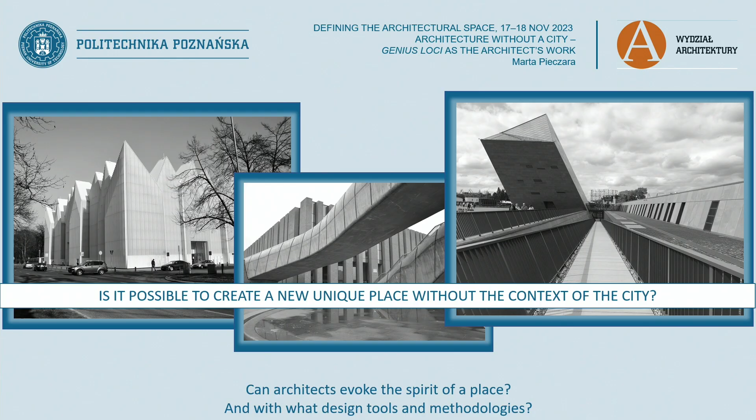So my question is: can we, as architects, create unique spaces without a city? Just in a vacuum, in a void? And if so, what kind of methodology, what kind of design tools could be of help?

Let me start with some theoretical background to this problem. No doubt you are well aware of some of these terms, nevertheless it is very important to explain the logic behind this problem.

First of all, the idea of genius loci in ancient Rome was interpreted as the protective spirit of a place. Today this term is so widespread that there is a variety of pronunciations - Americans would say genius loci or genius loci. That's why I decided to say genius loci, but it's a term that is being used in the discourse in philosophy.

When speaking about landscape, one of the beautiful definitions we come across in landscape studies is that genius loci is the value that defines the character of a space, hence this direct link with identity. Norberg-Schulz almost identifies the identity of a place with the identity of a person. He writes that the identity of a human assumes the identity of a place - the identity of a place is the foundation upon which the identity of a person is constructed.

So, on the basis of this model that he ordered, he made drawings, he also examined his pictures, and he noticed three interesting forms of landscape: the cliffs that provide a beautiful viewpoint to the ocean, the canyon shaped by water, and the plateau, easily accessible from the road. These three features of the landscape served as an immediate source of ideas, references to the history of architecture.

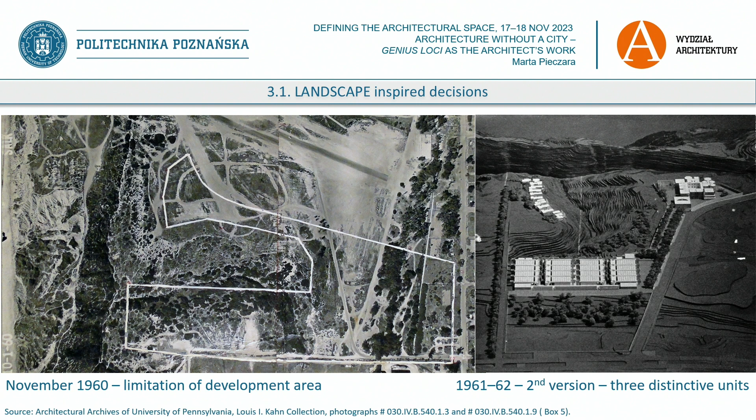And this is what Kahn relied on. He sketched bridges he saw in Italy, a variety of facilities he came across during his travels, mostly originating from his journey to Rome and Italy. This is where his first vision came from: the three independent parts of the institute. It would be composed of a laboratory, a conference center, and a residential part, all associated with the three forms of landscape.

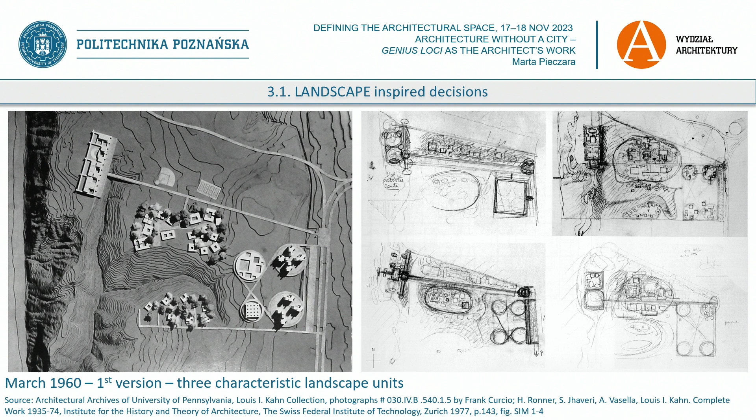Let me go back to the previous slide. On the left, we can see the lecture hall, which was supposed to be located above the cliffs and provide users with a beautiful view.

Unfortunately, several months later, the architect received a bird's eye view of the land, and it turned out that the building could not be located where he wanted because the area was protected due to rare endemic plant species found there. Nevertheless, in his first assumptions, the connection of this part of the plot with the conference center was so strong that he simply decided to move it a little bit inland in order to fit the limits allocated for development, but he still wanted to preserve this connection to the landscape.

And the three parts of this project are called as a reference to old icons. So the conference center is the new Acropolis, the temple of knowledge. We talked about temples today. That was supposed to be a temple of knowledge, a place for meeting.

And then the Pompeian village. We listened to a lecture about Pompeii today, so it's an intellectual shortcut for the architect. He uses these picturesque images of houses, harmonious houses that are somehow fitted into this landscape. And finally, the labs.

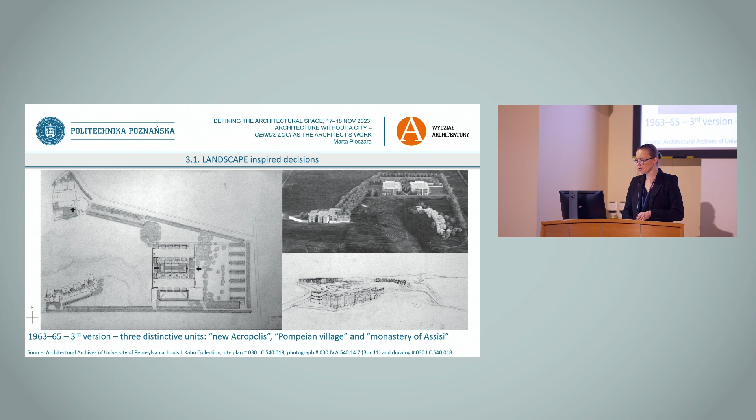The labs perform the key role, the key function, which he called a monastery. He was inspired by the monastery in Assisi because this monastery was listed by the client as the perfect environment for scientists to work. So, as far as architecture designed for the purpose of these three units that are linked to the landscape, we can see that the architect has used a variety of methods.

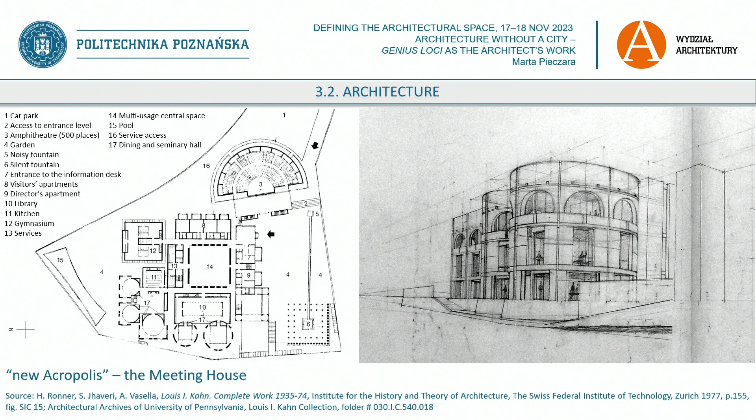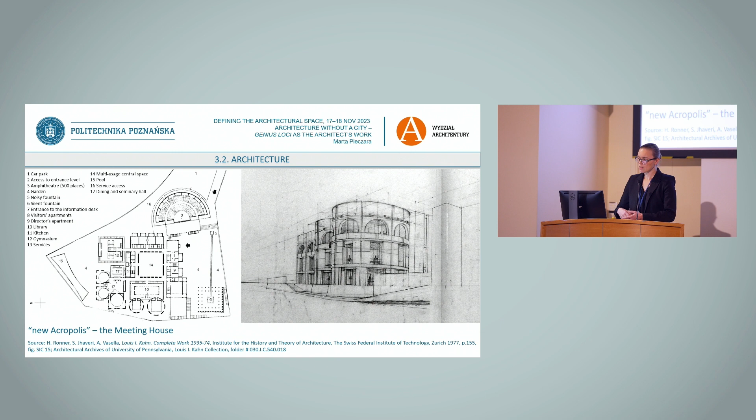He uses a very extensive typological analysis of architecture, relying on the richness of ancient forms, including Roman architecture, as you can see in the sketches in the section. Let me emphasize once again the aspect of landscape, the fact that it is so beautiful that the building is supposed to crown the cliffs, transformed into this round form of buildings that offer these beautiful views.

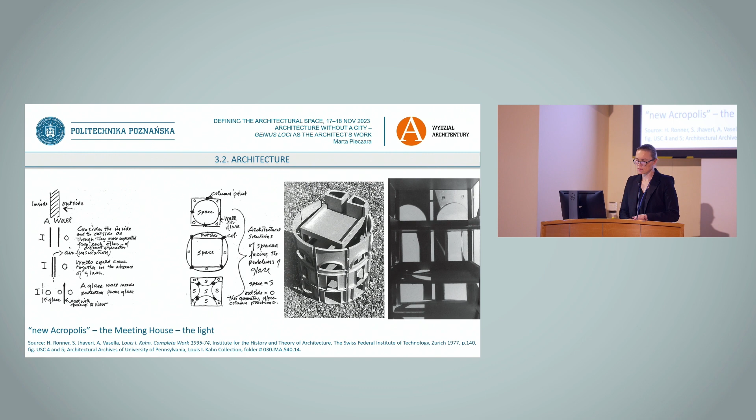So speaking about this project, we cannot disregard light. It was one of his key assumptions. In his previous works, he came up with the idea of a double wall. The building was surrounded by a second wall that was also inspired by the ancient Rome ruins. And once again, archaeology links beautifully to this project.

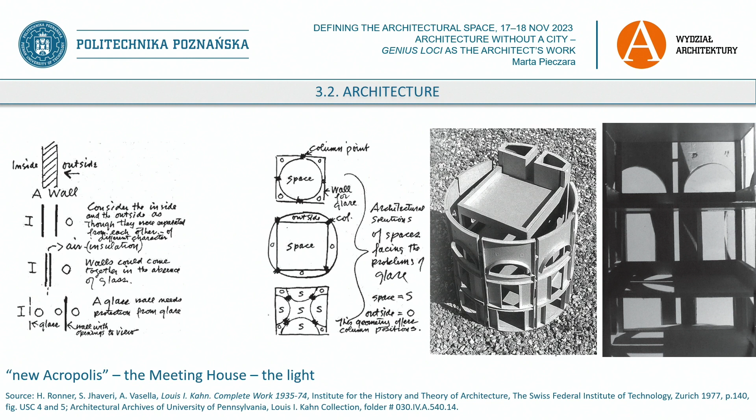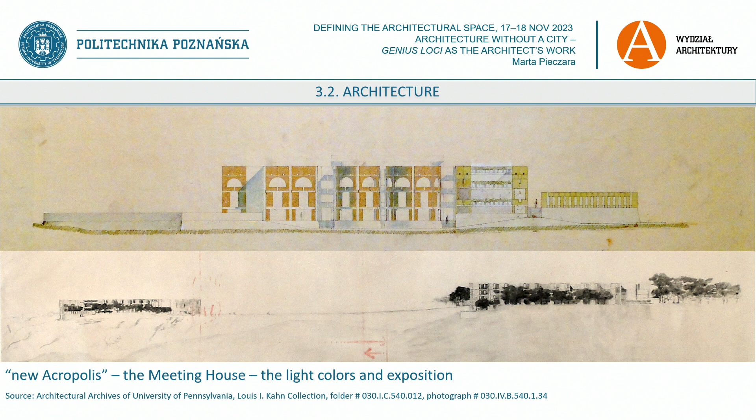Having calculated precisely the distance between the first and the second wall, we can ensure that the windows are shaded during these key periods of the year when the building could be overheated. Today we use computers for this purpose, but to make sure this was exactly the effect, a model was simply erected on the plot, and observations were carried out to see if it actually works or not.

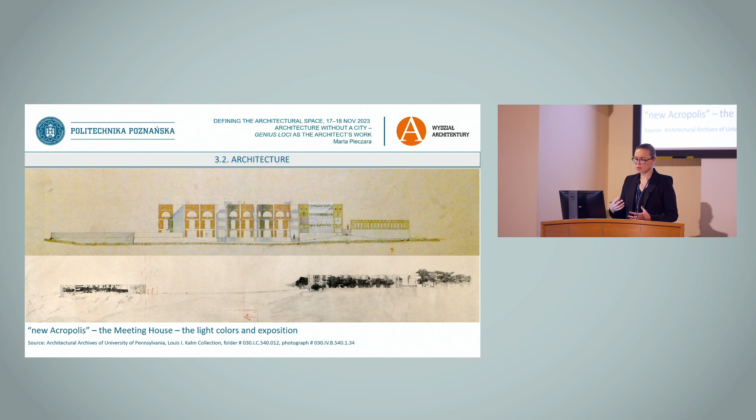And then color. Louis Kahn focused on the effect that the light will create on the facades of his buildings, and how to modify this effect so that it is harmonious with the landscape. So he was looking for the right hue, he was looking for the right color.

And now over to the residential part. It was supposed to be based on the archetype of the Pompeian village. So he was also looking for the right typology, the rhythmical objects that are here squeezed into this canyon. He wanted also to use this picturesque quality of the cliffs, of these small oases of greenery with trees.

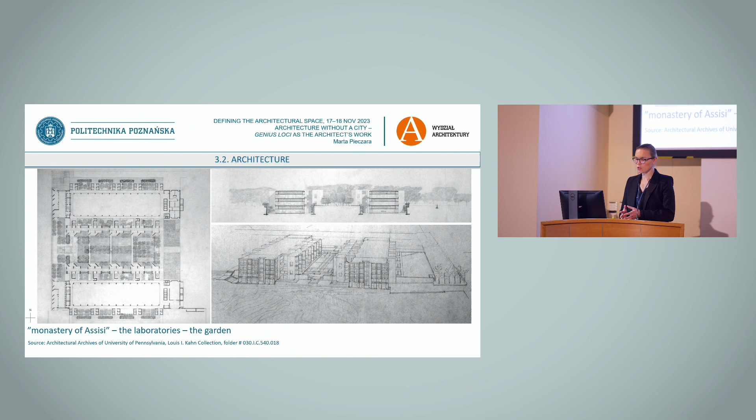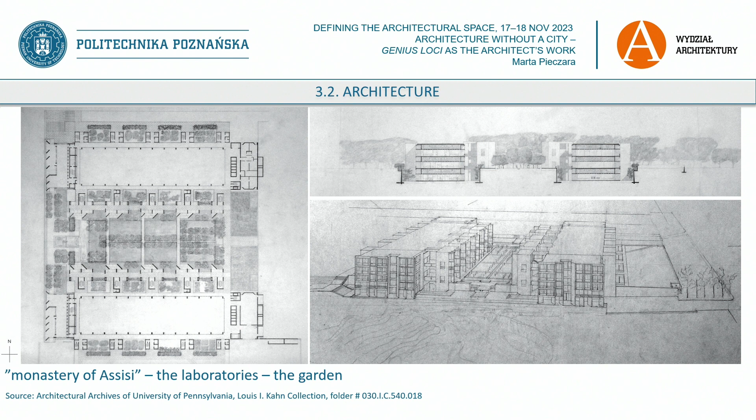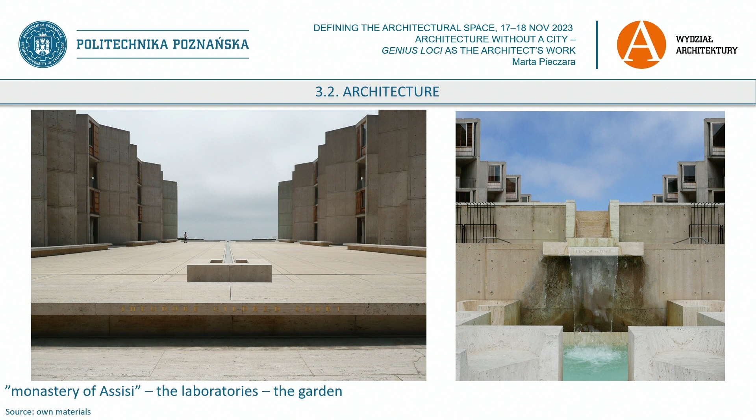And then the labs. The laboratories were supposed to be inspired by the monastery in Assisi. Originally, there was a garden in the middle, and the cells, so to speak, of the scientists were to provide a garden view. But then, as a result of cooperation with landscape architects, the garden was replaced with this square. It's a public space with a water body, and it's considered unique worldwide.

So people travel there to look at the ocean, and Louis Kahn managed to create this project in a place that was deprived of any kind of urban context.

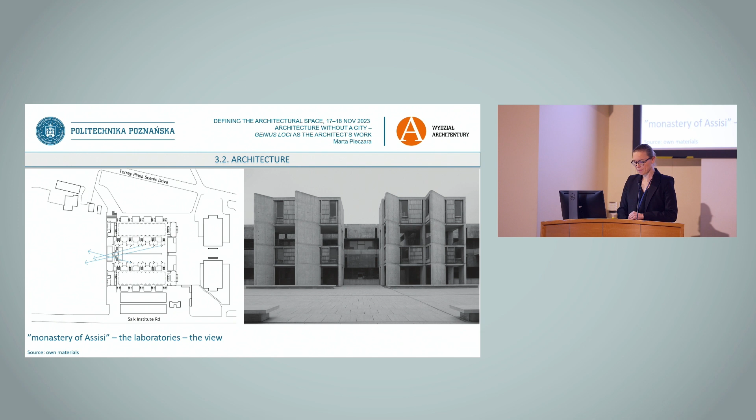When it comes to the rooms that were inspired by the cells of monks that face the internal court, let me explain why they are located every second floor. Well, the client said that the worst thing for scientists in this area is the sense that just above you there is another scientist who is one step ahead of you, and the scientists that work on developing vaccines.

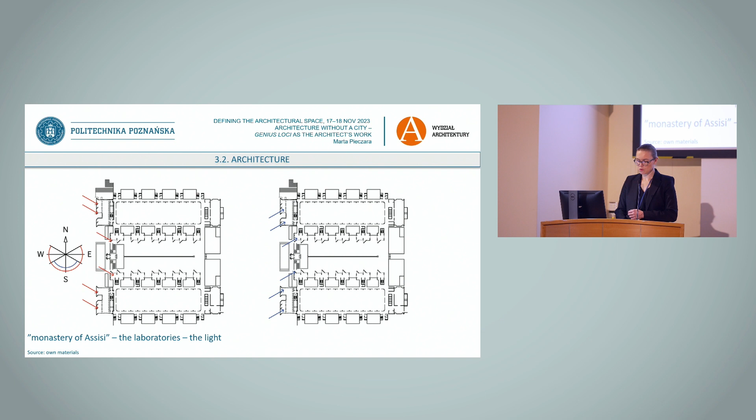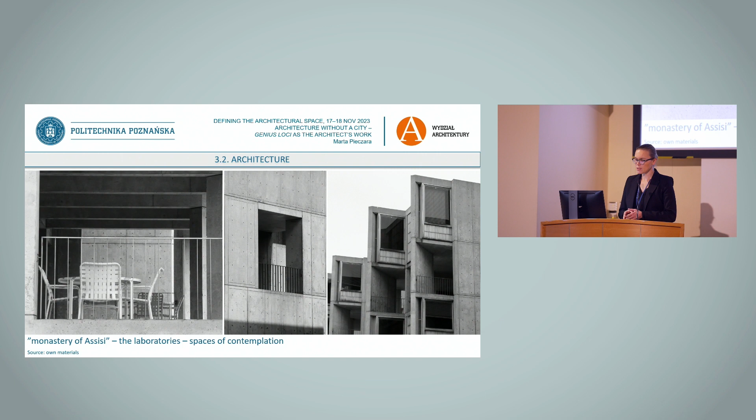So, light. Let me once again tell you that this placement of the walls at the angle of 45 degrees is not accidental. It provides shade during the summer season. And once again, referring to this atmosphere of work at the monastery in Assisi, the architect proposed these external places for contemplation, for the exchange of thought between scientists, focusing still on colors and on materials.

And today, during one of the presentations, I also saw the analysis of colors, right? This is something that we do also today. And Louis Kahn, 70 years ago, also carried out color analysis, and specifically it was about the color of the cliff. So to obtain this color of concrete, it took a lot of time, a lot of tests, and he even had to send his employee to California in order to ensure the sample of concrete that would be the exact beige color that he wanted.

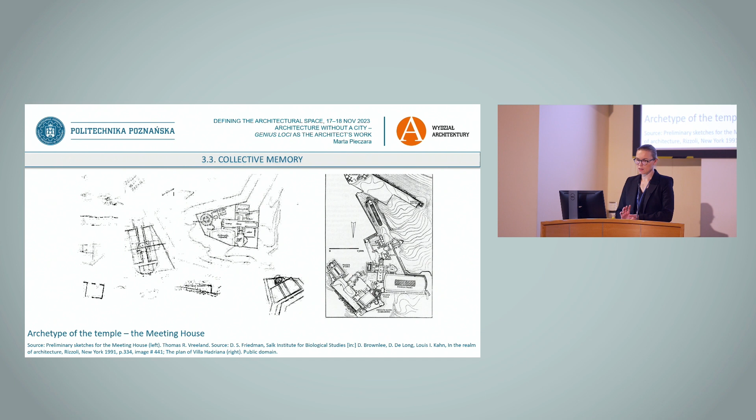So here we have these structures that are made of landscape and architectural elements. But how did the architect manage to add the element of human's memory? Well, he used archetypes. How did he do it? By examining typology. And here archaeology turned out to be necessary.

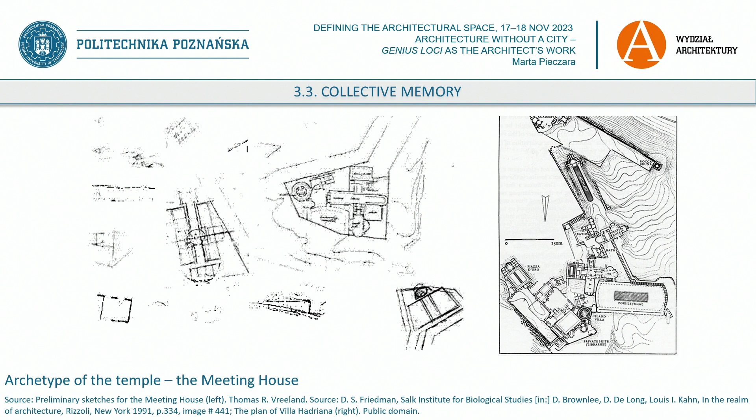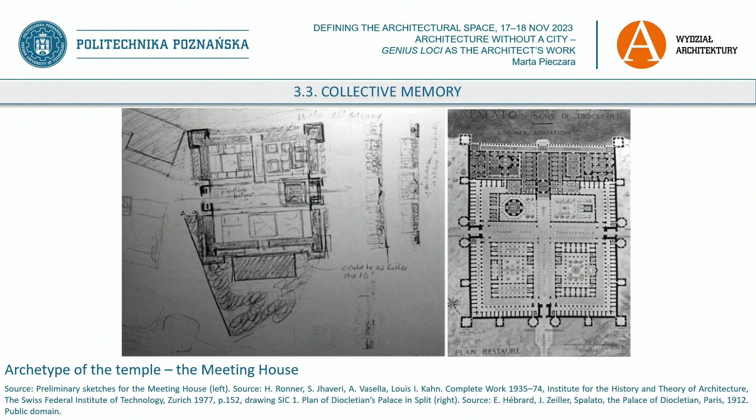As you can see, he looked for architectural solutions by examining the typology of famous Roman monuments, such as here, one of the palaces that was quoted multiple times in his sketches. Finally, the form changed, but what remains is this archetype.

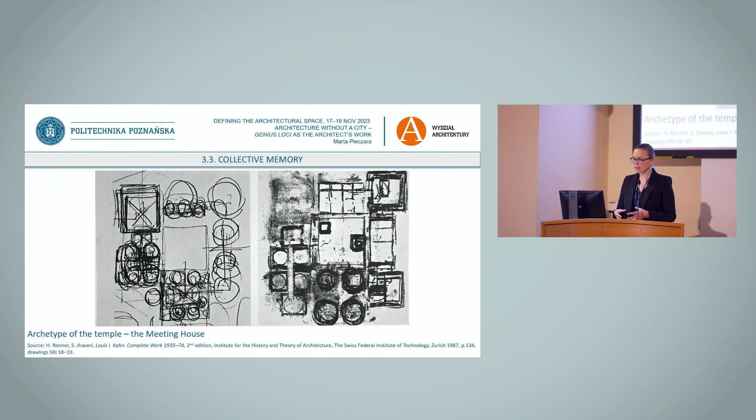So here we have the archetype of a temple. On the one hand, we have a landscape form that is privileged. This is the hill. And on the other hand, we have monumental architecture. On top of that, we have the central typology. In the middle, in the center, we have the idea of this temple of knowledge.

Yet another archetype was used to create the residential buildings, and here the architect spoke of the Pompeian village, but he construed it a little bit more broadly during his voyage to Italy. The architect made a lot of drawings in the entire Amalfi region, not only in Pompeii themselves. So the view of this typology of buildings squeezed into cliffs, into rocks, found its permanent way into his memory.

So he knew that it's the image that many people will recognize, so it makes part of our collective memory, and it was used in here.

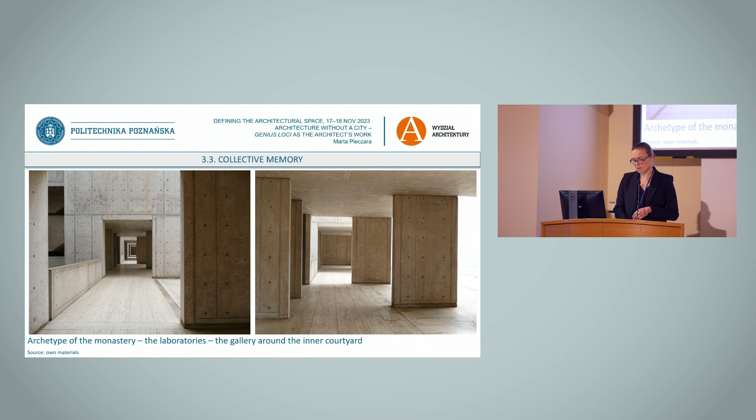And finally, the archetype of a monastery that was used to design the typology of the lab. Here, let me emphasize this strong structure. On the outside, we are dealing nearly with a fortress. There are no windows, but all of the windows give you a courtyard view. We also have a type of an arcade that surrounds this space. It's a clear reference to a monastery, and then finally the objectives of the scientists.

So to sum up, how did he manage to create such a space that is now being referred to as unique by Frampton? He gives the example of this project as a place form and encourages people from all over the world to go and see this specific space.

So Kahn, in all of the three units, used landscape analysis, identified the prevailing elements of the landscape and linked them to the function of a specific building, and then applied the right typology on the basis of his archaeological research. And that's how he referred to the archetypes that are deeply rooted in our collective awareness.

So to sum up, the project procedure applied by Kahn, who succeeded to create a unique place without the context: first, landscape analysis, functional analysis, typology, and then by combining the three, he referred to the archetypes rooted in our collective memory, and as a result, he created, apparently out of nowhere, this genius loci. But in fact, it was the outcome of his work and of the many analyses he carried out.